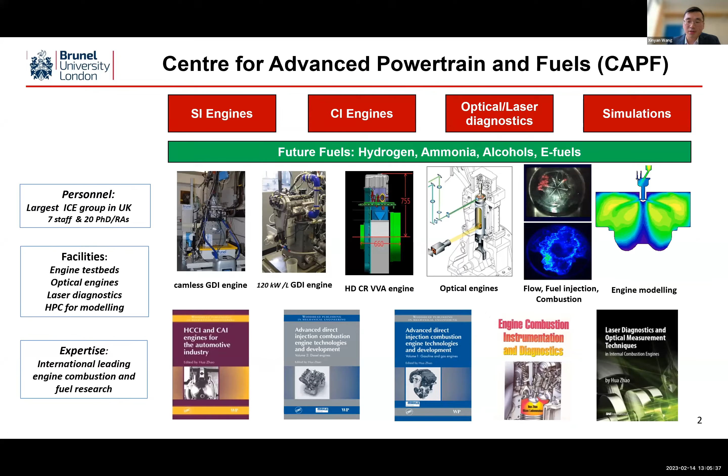In addition to these experimental tools, we have access to UK HPC facilities so we can perform advanced simulation studies - for example, here I show the engine combustion process. Over the last 20 years, the centre has published 5 books on advanced engine technologies, engine instrumentation, and laser diagnostics.

This is the outline of my talk. The first part will cover the challenges and opportunities of moving towards net zero.

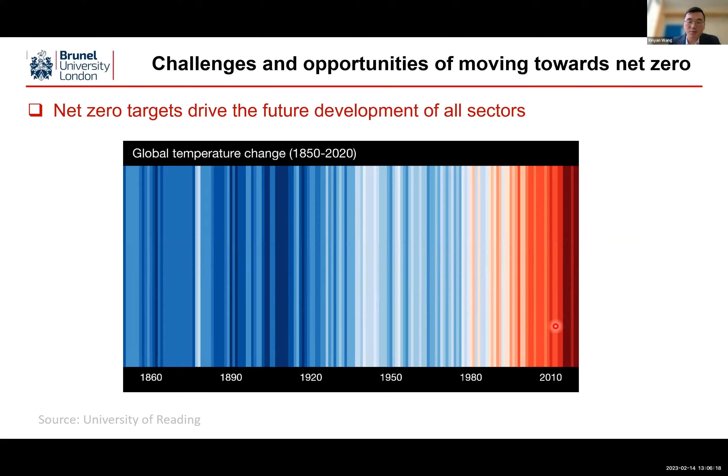So this graph shows the global temperature change since 1850. The blue color indicates lower temperature and the red color indicates higher global temperature. So it is visible that we do have global warming effect. In recent 20 or 30 years, the temperature increased significantly.

When we look at the carbon emission profile from 200 years ago, it is visible that in recent 100 years, carbon emissions have exponentially increased. Obviously there is a close relationship between global warming and carbon emissions, so we do need to address the challenge of carbon emissions.

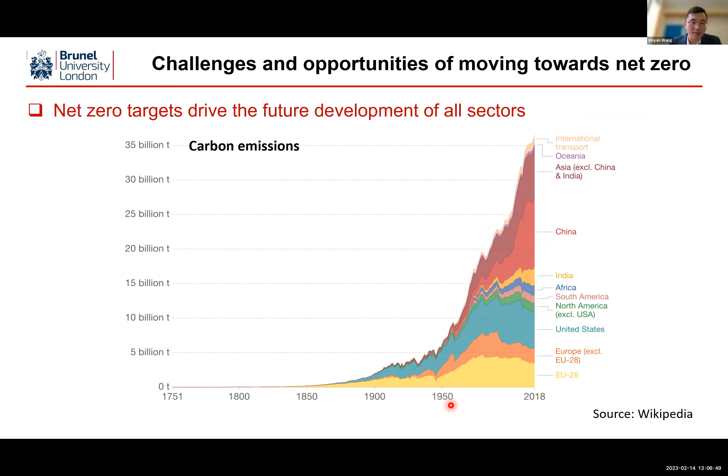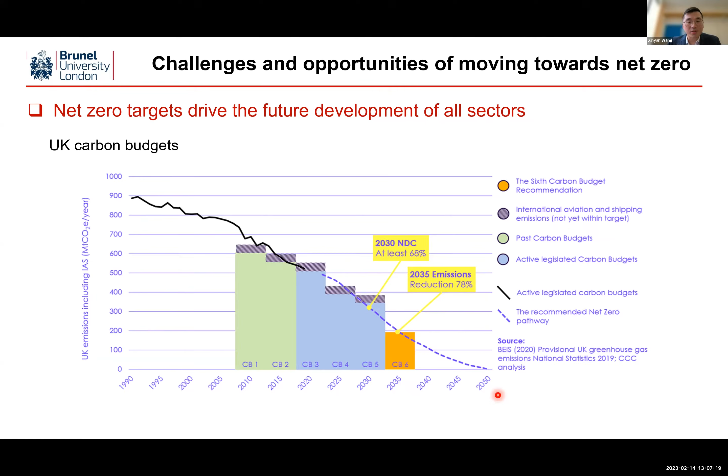In the UK, from 1990, we do see carbon emissions gradually reduce, and the UK government also set a stringent target for carbon reduction. For example, by 2030 we have to reduce carbon emissions by around 70%, and by 2035 around 80%. By 2050 we have to achieve net zero. These are all very ambitious targets, but it's not very easy to decarbonize, in particular for the transport sector.

The left graph shows the carbon footprint of a UK citizen. The green color indicates the travel sector, and currently around 27% of carbon emissions are from the transport sector in the UK. We can use different transportation propulsion systems to reduce carbon emissions.

The right graph shows the sale of light duty or passenger vehicles in the UK in 2021. You can see the petrol and diesel powered vehicles show significant decrease, while hybrid vehicles - mild hybrid - and also pure electric, plug-in, and other forms of hybrid have significant increase in the last few years.

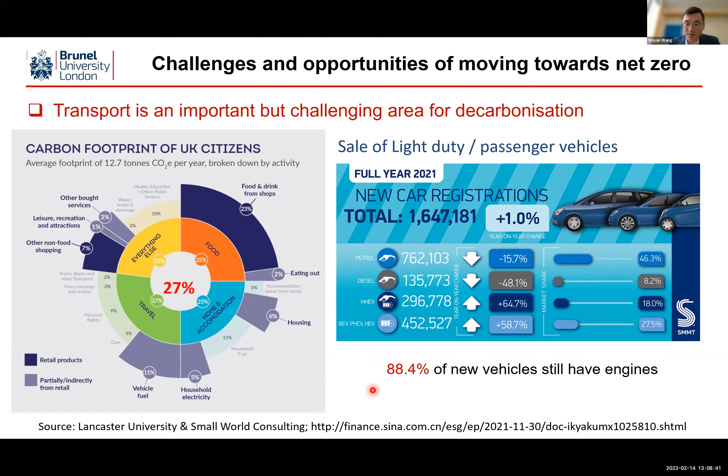But when we calculate the percentage of vehicles with an engine - because hybrid vehicles do have an engine - around 88% of vehicles still have combustion engines. For heavy duty sectors, for example trucks or long haul vehicles, aviation, marine, and special applications like remote agriculture vehicles, mining or other machinery vehicles, these sectors will be even more difficult to electrify. So we do need to see options to decarbonize.

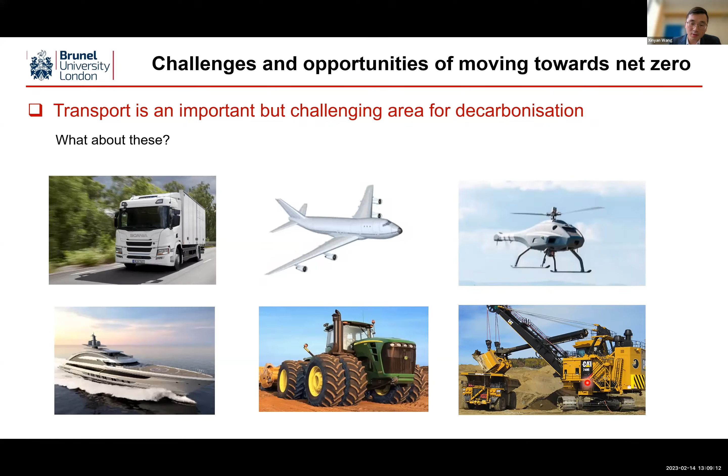If I summarize the scenario of different propulsion systems into this graph, we can see for the short term we do have alternative solutions, for example hydrogen fuel cell or battery electric vehicles. But currently the market share is still low, meaning it can only deliver very limited carbon reduction potential. For the long term, hydrogen fuel cell is still promising, but there are limited applications, for example when you need relatively higher power density such as aviation or marine - there will be very limited application of these alternative solutions.

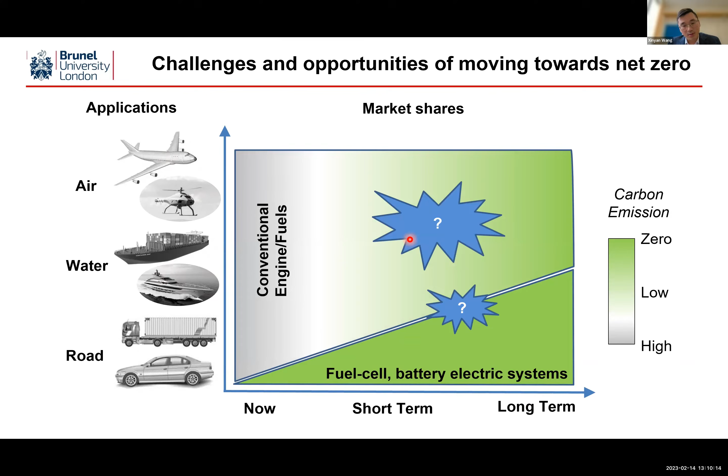But we can't rely on fossil fuel engines because they have higher carbon emissions. So we need to find solutions. First, can we find a short-term solution and a long-term solution for heavy-duty and long-haul vehicles?

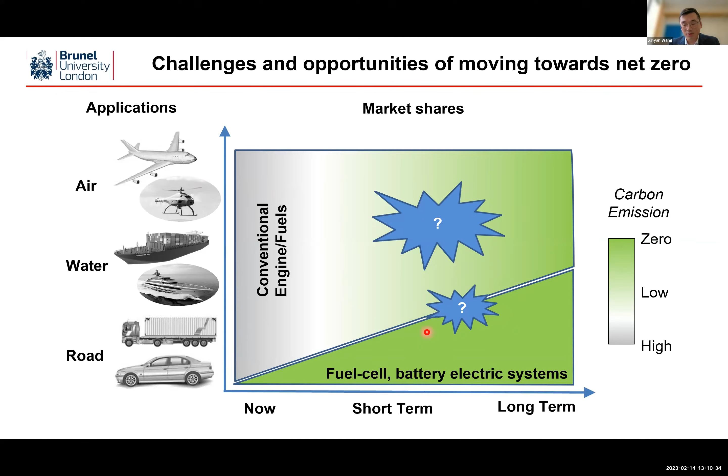Secondly, is it possible we can borrow something from the hydrogen fuel cell or battery electric system to bridge the gap and deliver faster carbon reductions? I do think we have some solutions here.

If we look at the fuel cell, it uses hydrogen-based fuel, whether it's pure hydrogen, ammonia, or methanol derived from hydrogen - it has zero carbon fuel, hydrogen. Secondly, from the electric vehicle, it has a very high efficient electric motor generator. If we combine all the systems together, we may have a sweet spot here.

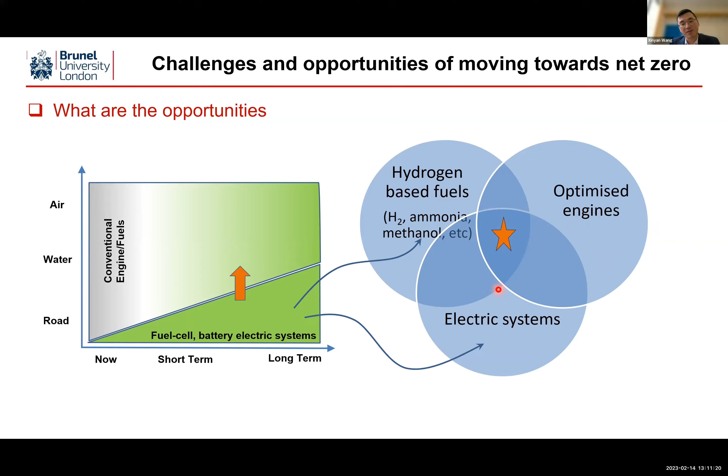Basically it integrates all the existing technologies, for example using hydrogen in a combustion engine, also integrating the electric system to further improve system efficiency. That's the starting point of the hydrogen or alternative zero carbon fuel combustion engines.

So the second part will be the advantages of the hydrogen combustion engine. First, I would say it is a net zero solution. If we use renewable energy, whether it comes from wind power or solar power, we'll be able to use that renewable energy to split water by electrolysis to produce hydrogen.

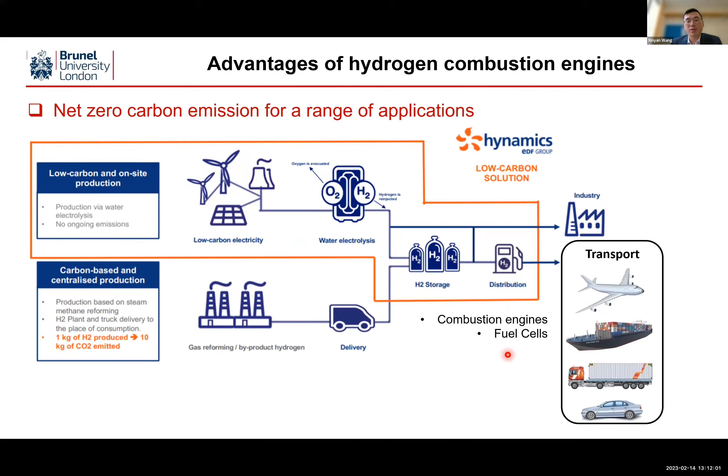Then it can be stored and distributed for industrial usage or transportation. We can use combustion engine technologies or fuel cell technology, but when we also look at the hydrogen combustion engine, there are several advantages.

First, carbon emission is obviously zero if we have the energy from the renewable source. Secondly, I think it's quite important: combustion engines can use low purity hydrogen, which means we can reduce the hydrogen production cost. We can also make use of existing engine technologies and hybrid electric systems to further reduce the cost of the engine itself.

And also, if we look at the efficiency, we can directly put hydrogen into any existing engine, but obviously we need to do modification to have better efficiency. By slightly modifying the current engine, we'll be able to achieve decent efficiency. If we integrate more advanced engine technology, we'll be able to further increase the engine efficiency, which is equivalent to fuel cell efficiency.

In terms of performance, it's obviously a transient machine which can accommodate instant cold start and shutdown, just like a typical combustion engine. It doesn't need significant time to warm up or a complicated shutting down procedure.

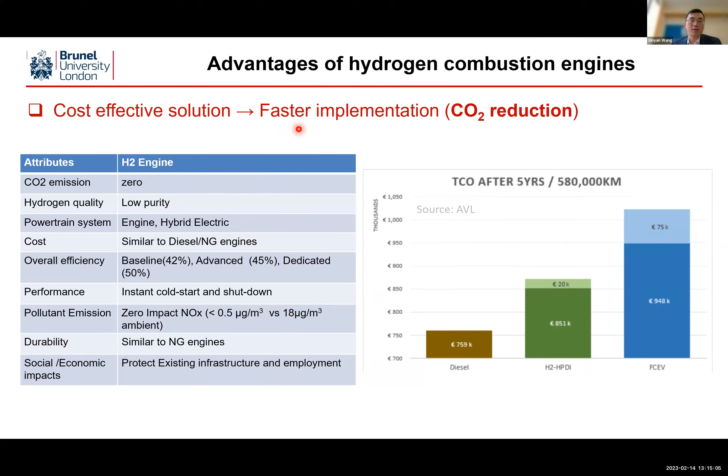For hydrogen, it is almost half of the fuel cell electric vehicle. So it is quite promising because it is a cost-effective solution, which means we can quickly implement this technology into the market, and also this will deliver a fast CO2 reduction.

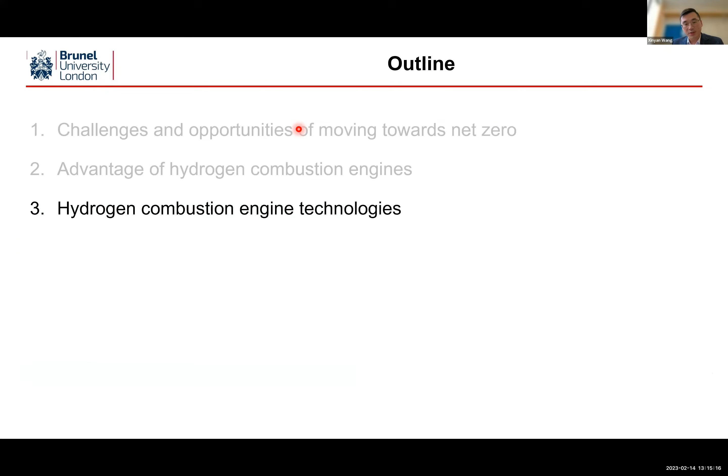Here I would like to talk about hydrogen combustion engine technologies. As mentioned, even for an existing engine, if we put hydrogen into the engine we'll be able to burn it, but it doesn't really guarantee high efficiency combustion. So what we're looking at is how to improve engine efficiency by considering the difference in fuel properties. This table shows the laminar flame speed of different fuels.

For hydrogen it is around 290 centimeters per second, significantly faster than other fuels. For example, methane is around 40 centimeters, and fossil fuels like gasoline are in a similar range. Another important fact is the flammable limit for hydrogen is quite wide, it can burn from 5% to 75%. And the ignition energy for hydrogen is minimal, less than 0.02 millijoule, compared to methane which is around 0.3 millijoule.

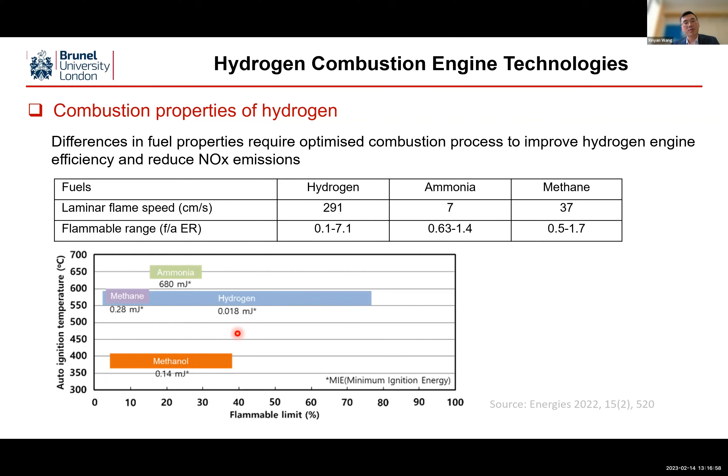This very unique property can pose some problems when we design the hydrogen engine. First, the lower ignition energy can lead to backfire, which is dangerous. Also, the fast flame speed can produce excessive combustion, which can damage the engine. So when we design or research and develop the engine, we need to look at these properties and optimize the engine technologies to accommodate them.

The first point I want to discuss is the hydrogen injection method. We can make use of existing engine architecture by adding one port fuel injector to provide fuel to the combustion engine, then burn it inside. But there are disadvantages: we have limited power output because the added hydrogen would displace the fresh intake air, meaning less intake flow, which limits peak engine performance. Also, there's hydrogen potential left in the intake port, which can cause backfire into the intake port.

It can be dangerous. Alternatively, we can make use of direct injection. Here is a schematic of the direct injector - we just add the injector to the cylinder, providing fuel directly into the chamber so that it avoids any hydrogen in the intake system. This can avoid backfire, and also doesn't displace any fresh air. In this sense, we can increase engine power performance, but this also means we have to make significant modification to the engine, which adds cost.

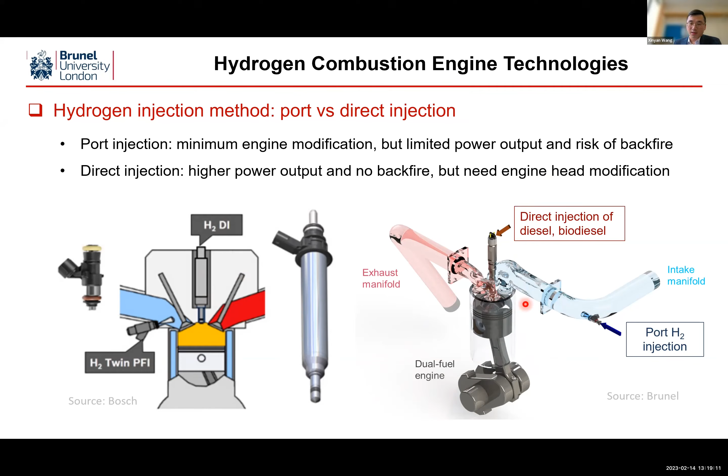Similarly, another approach relates to the gasoline type. We can make use of diesel type, where we use pilot injection of diesel as an ignition source to ignite the mixture from port fuel injected hydrogen. We have done a lot of work on this dual fuel ignited hydrogen mixture, and in addition to the fuel supply, another important aspect is the combustion mixture preparation.

We can operate the engine at a stoichiometric condition. In this sense, we can make use of existing after-treatment systems to reduce NOx emission, and it does have better engine power performance and better transient operation condition. But...

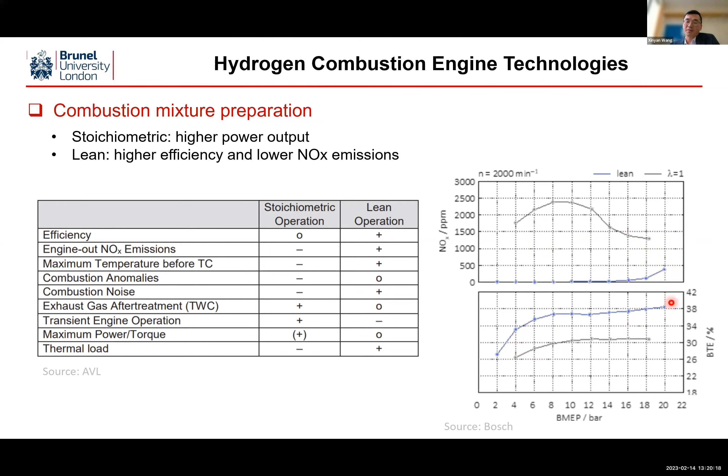Alternatively, we can run the engine at lean condition. In that sense, we can increase the engine efficiency, and the lean burn would significantly reduce NOx emission. This is the results from Bosch: if we run at lambda 1, basically the stoichiometric condition, NOx emissions are quite high. But when we run lean, the NOx emission at low load condition is almost zero, and it will start to increase at higher load, but it's still quite lower than the stoichiometric condition. Also, if we look at the efficiency, it is much higher than the stoichiometric condition.

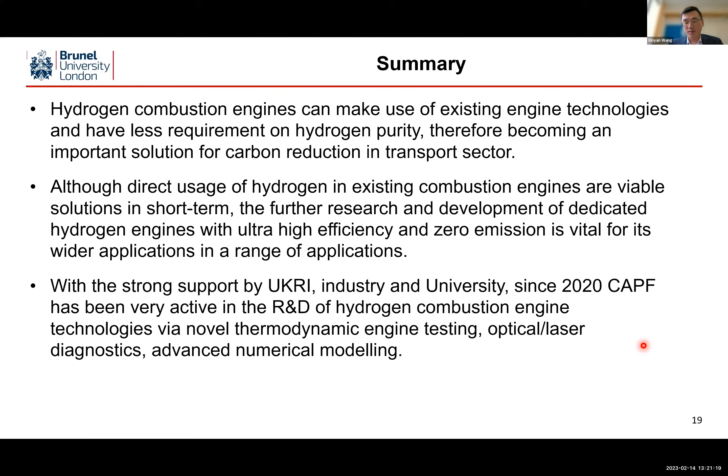So I think I will briefly talk about hydrogen combustion in this talk, and here I'd like to summarize. Hydrogen combustion engines can make use of existing engine technologies and have less requirement on hydrogen purity, and therefore can be an important solution for carbon reduction in the transport sector. Although the direct usage of hydrogen in existing combustion engines is viable in the short term, further research and development of dedicated hydrogen engines with ultra-high efficiency and zero emission is vital for wider applications in a range of applications. With strong support by UKRI, industry and Brunel University since 2020, the center has been very active in R&D work on hydrogen combustion engine technologies through a number of techniques. I think I'll finish here. Thank you very much.

Wonderful, thanks, Xinyan. I think it's really interesting to see, especially in a time where we're always looking for a circular economy approach to keep recycling and reusing things, that we can use these kinds of developments to take technology we've been using for a while and let it go for that little bit longer, rather than just throw it away and get in completely new. So I think that's fantastic. Thank you very much. Yeah, thank you.

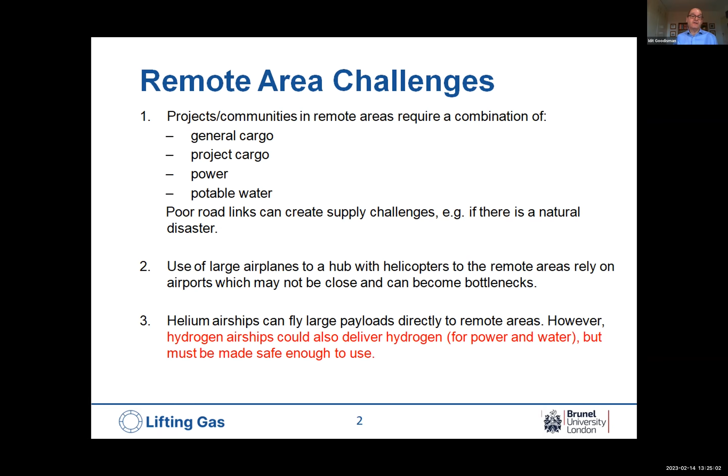In situations such as a disaster, what normally happens by air is large aeroplanes will fly to airports fairly nearby, transfer their cargo to helicopters, and the helicopters will carry lower payloads to the remote areas. These airports can become bottlenecks with this sudden increase in activity. Helium airships can fly large payloads directly to remote areas. However, hydrogen airships could also deliver hydrogen from the lifting gas itself, and from that hydrogen you can get locally power and water. However, and this is the focus of our work, the hydrogen must be made safe enough to use.

So our innovation is creating flame-resistant regions within hydrogen airships. Now, whether it's our solution or another solution, a hydrogen-powered airship, a hydrogen lifting gas airship, can create a chain of advantages.

It would fly directly to the remote area, delivering general cargo, project cargo, and hydrogen. The hydrogen can be used as fuel for a hydrogen power unit. An engine power unit can run on lower purity hydrogen, while a fuel cell power unit needs very high purity hydrogen. So hydrogen from an airship envelope would need some sort of purification if that was the case.

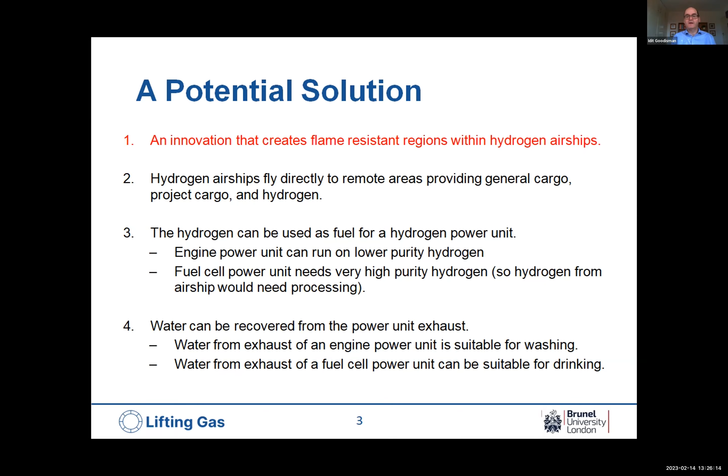But in terms of the water that can be recovered from the power unit exhaust, water from an engine power unit is suitable for washing but not drinking. Water from the exhaust of a fuel cell power unit can be suitable for drinking. I believe studies have been done on PEM fuel cell power units and drinking water.

Putting a few numbers on this: if we take a scenario where an airship flies and delivers cargo to a remote area, and for simplicity flies back empty, you have the opportunity to offload the cargo and offload some of the hydrogen. For every 13 tons of cargo offloaded, you can offload 1 ton of hydrogen. And from every 1 ton of hydrogen, you can recover up to 9 tons of water from the power unit - the other 8 tons coming from oxygen in the air at the remote area, which you haven't had to carry.

Comparing helium and hydrogen: you can have a cargo airship designed for 150 tons, and it would deliver the 150 tons and come back empty - that's the helium airship. The hydrogen airship would deliver something like 100 to 130 tons, that's a weight penalty to make the system safe. I'll come back to why I'm talking about a range. That would result in 7.7 to 10 tons of hydrogen being offloaded, 70 to 90 tons of water, resulting in a useful delivery of, in effect, 177 to 230 tons.

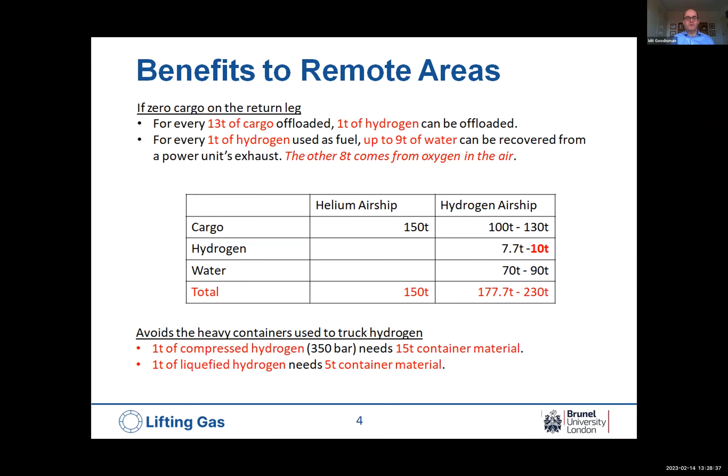What's also very interesting, a natural advantage for airships carrying hydrogen, is that you're carrying it at 1 bar pressure, so you don't need heavy containment material for compressed hydrogen. 1 ton of compressed hydrogen, when trucked at 350 bar, needs 15 tons of container material - that's the ratio of hydrogen to containment material. Or with liquefied hydrogen, after using a lot of energy to liquefy it, 1 ton still needs 5 tons of container material. In both scenarios, we're not carrying such container material - we're doubling up on delivering cargo and delivering hydrogen.

Quick example from the previous slide - I mentioned up to 10 tons. To give a feel for what that gives you, it can power a hydrogen engine power unit for 53 days with an output of 115 kilowatts of electrical power. There are figures on how much that could serve in different countries based on available statistics. Another way to look at it: that's enough hydrogen to refill a car's hydrogen fuel tank nearly 1,800 times - a sizable amount to take to a remote area.

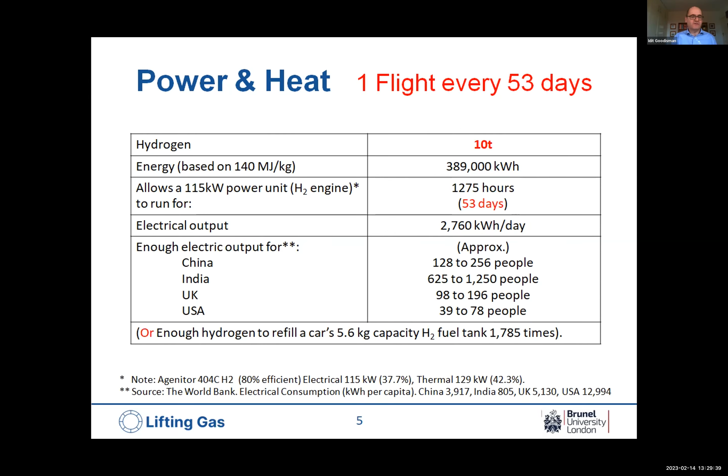Again, to illustrate what that hydrogen can give you - in terms of water recovered, you get 90 tons of water, that's 90,000 litres. In an emergency situation, that's enough to maintain water for between 113 and 226 people, based on 1 flight every 53 days for that particular airship. So again, it has a few benefits there.

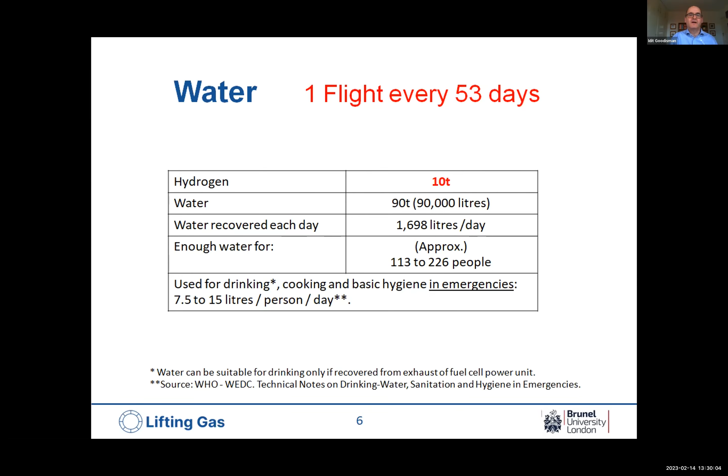Okay, moving now on to the technology itself. Flame arresters in pipes are well established but too heavy to be used for airship purposes. So why can we consider thin flame arresters - this is what our technology is based on - for airships?

That was a quasi-detonation, and with a lower richness of the hydrogen, that turned into fast flames, still going very fast, 500 to 600 meters per second. That's why typical flame arresters for deflagration will be at least 20 millimeters passageway length and longer.

So what happens if you have, and that's a confined flame, it's very important to stress that. That's pretty much confined in that tube. What happens if you have an unconfined flame?

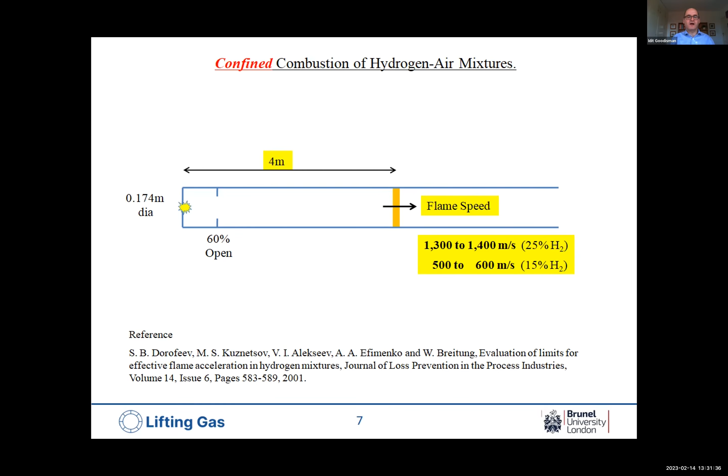Well, an experiment was done, a large-scale experiment in Germany in 1983, with 29% hydrogen. At the same distance of 4 meters, the flame speed was only 40 meters per second. Measured further out at 16 meters, it rose to 80 meters per second.

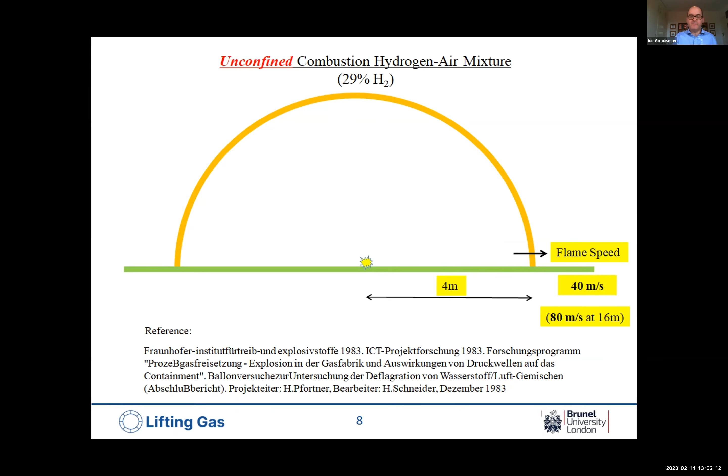So that unconfined nature provides an opportunity to consider thin meshes to act as flame arresters for airships. That's one important factor. It's not easy by any means, because that's still pretty fast flame, but it's something that might be achievable, and that's what we're pursuing.

So essentially what we're talking about is constructing cells within an airship's envelope. On the left-hand side, you can see a cell made of a top panel and 4 side panels, and the 6th side is made of the envelope of the airship itself. Very thin mesh cells, less than 1 millimeter thick, and on each panel you can have, let's say, 1 or 2 mesh layers together.

There's various reasons for that. It's a more conservative design if you've got 2 mesh layers instead of 1 mesh layer.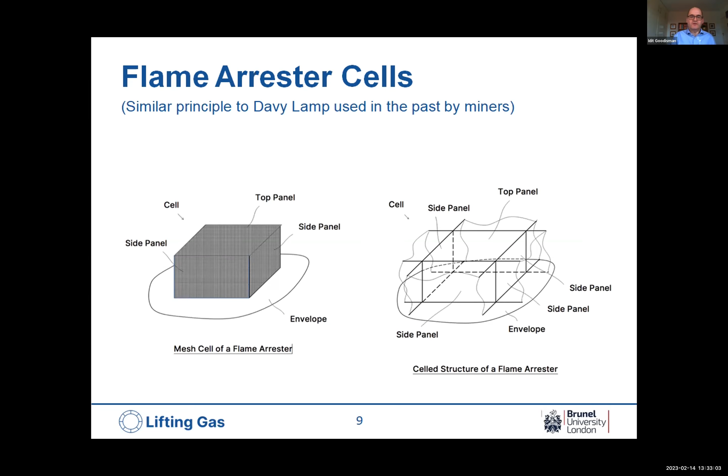The panels are connected together to form a continuous structure around the inside of an airship's envelope, so that for a non-rigid airship, you see these mesh panels. The dimensions of the mesh panels can be 3 meters by 3 meters by 2 meters, 2 meters being the sidewall, creating a 2 meter thick combustion resistant region around the inside surface of an airship's envelope.

So that if there's a tear in the envelope and some air mixes with the hydrogen, and there's a static charge and a combustion, the combustion will be contained inside 1 or maybe a few cells, depending on the nature of the combustion. Most importantly, the central volume of the lifting gas will be protected from the flame. It's less likely to combust.

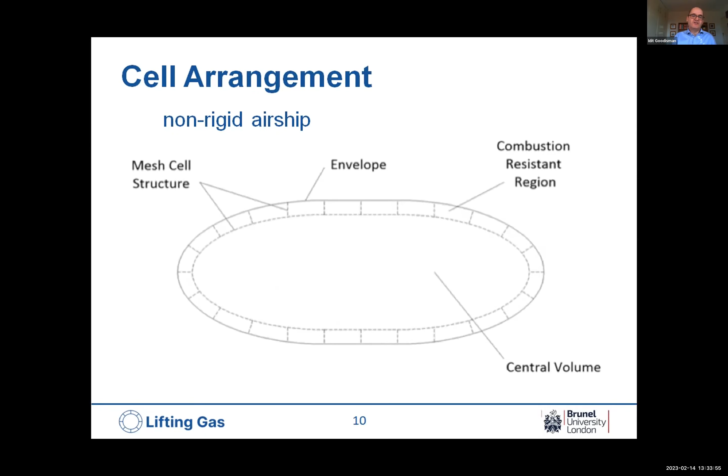For rigid airships with multi-cells, it's a similar type of approach. I'm not showing the framework here of the rigid airship, but you can provide a similar structure there, a mesh arrangement performing a similar function.

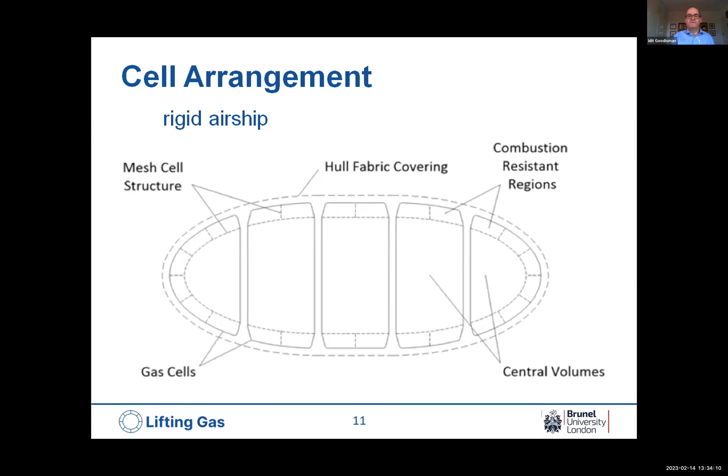The mesh layer, as I mentioned, weighs a significant amount, but that's offset by the fact you're using hydrogen to some degree, and you get additional buoyancy.

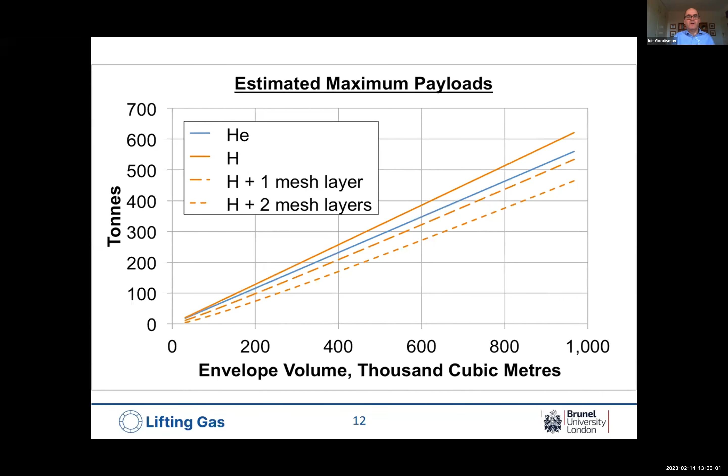Essentially we'll be testing small samples of meshes and perforated plates. One of the interesting and very useful features of this small test rig is that you can control the flame speed. That comes in very handy when you're trying to study this.

Should that prove successful, we can move to outdoor testing of mesh cells, maybe 1 meter by 1 meter by 1 meter, and then slightly larger and then slightly larger to see how they perform. And should that progress further, we will end up with airship integration testing.

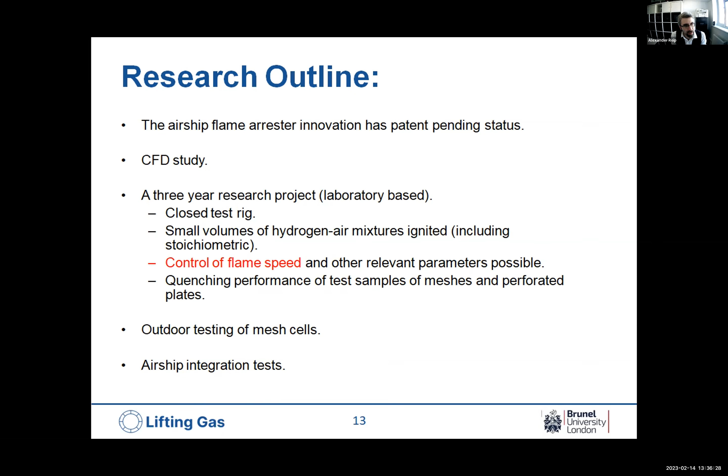Thank you very much, Michael. It's really interesting to see what's going on in that, because we've seen lots in the news about helium airships and just the worry about the sheer amount of helium you need when it needs to be used for so many other, in some ways, important applications. So yeah, it's good to see that there's more work going on the hydrogen side.